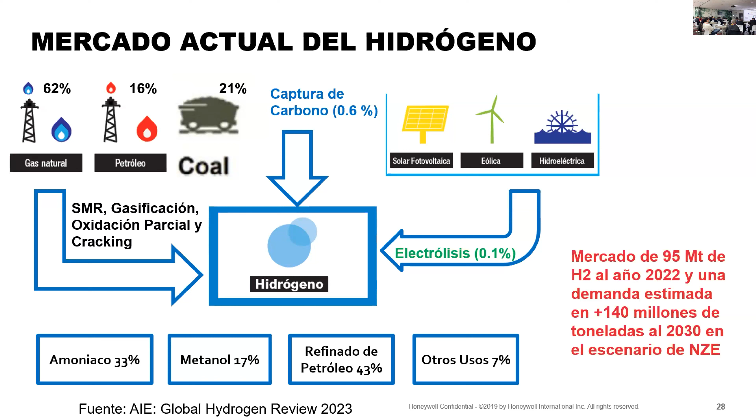No deseo decir nada más. A partir de ahora quisiera dejarlos con Jeff. Jeff, please go ahead.

Okay, can everyone hear me okay? Yes. Just sharing my screen.

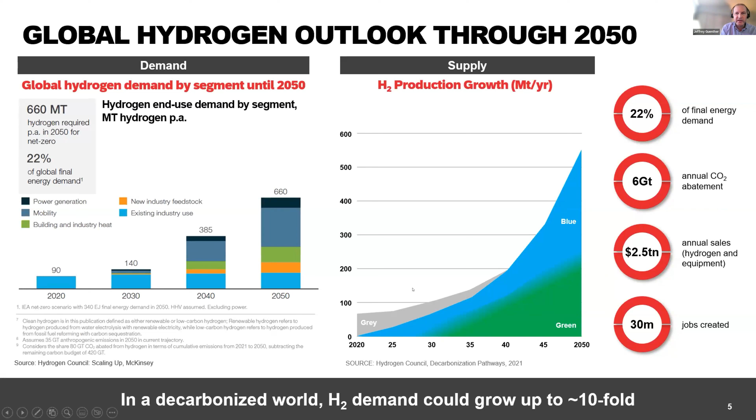Our view has been that that's a little bit secondary to the blue hydrogen market, with really a lot of traction happening post 2030, but certainly a lot of interest in that space right now and a lot of projects going through development phases. So that's really the story of hydrogen. And what I'm going to focus on is blue hydrogen, and what we have to enable blue hydrogen production today.

These are the two technologies that I'll be talking about. On the left is steam methane reforming, and on the right, autothermal reforming. The majority of hydrogen that's being produced today is through the steam methane reforming process. That's taking natural gas or methane, adding steam, operating over a catalyst to produce carbon monoxide and hydrogen, and then using a water gas shift reaction to further shift that CO with additional steam to produce additional CO2 and hydrogen.

This process is endothermic, meaning it requires heat to work. So that's why you'll see there's an additional fuel source that's needed to provide the heat for this technology. The key thing to notice here is that out of the SMR unit is a syngas that's rich in hydrogen. That's what's being produced.

But there's also a flue gas that's being produced in this process unit because of the need to provide an external fuel source and burn it. So you have carbon dioxide that's in this synthetic gas as well as in the flue gas.

The autothermal reforming technology is different. You can see it's methane reacting with oxygen to produce the CO and the hydrogen, which again will go through a water gas shift. This technology produces heat within the reaction, so it's not as dependent on any type of external fuel gas. There is still a small amount, but most of the heat needed to facilitate the process is automatically generated within the process.

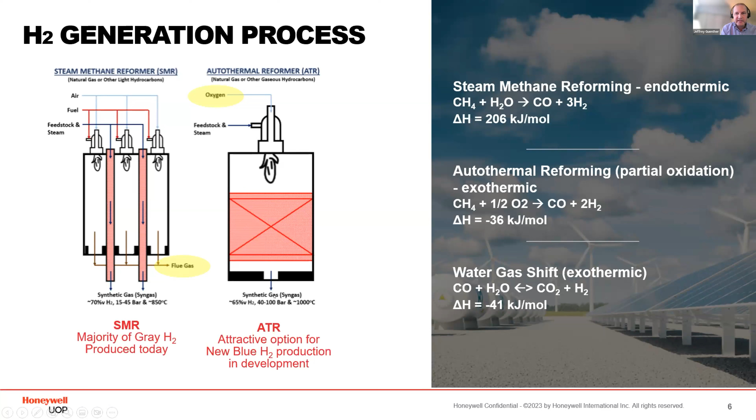What's key about that then is that all of the carbon from that feedstock is in this synthesis gas. Because there's not a large amount of external fuel gas, you're basically segregating all of the carbon in this syngas at a much higher concentration, meaning it's a really good opportunity to capture that carbon from that stream. So ATR is really being viewed as an attractive option for new blue hydrogen production because of its ability to really concentrate the carbon dioxide in that synthetic gas stream at a higher concentration.

So let's talk a little bit about what we have in the space of autothermal reforming solutions. As I mentioned before, the flow scheme is quite simple. You have natural gas going to your ATR unit with a water gas shift that's producing a hydrogen-rich syngas. Typical in the industry for any type of hydrogen production, it needs to go to a pressure swing adsorption unit that will convert that syngas, which could be in the 60 to 70% hydrogen range, into high purity hydrogen. So 99.9% or higher, which is typically what's required in refining and fertilizer applications and what's expected to really enable the hydrogen economy.

The tail gas or the rejection gas from this pressure swing adsorption unit is rich in carbon dioxide, so it could be between, again, 60 to 70% CO2 after it goes through the system, meaning it's a really good opportunity to capture that CO2. And when we think about capturing CO2, the higher concentration of the CO2, the more economical it is to capture. So what we're seeing in the marketplace is that these autothermal reforming units are really being looked at for large world scale hydrogen production, largely because of the benefits that you get from scale and due to some of the high cost to enable this process, for example, through this air separation unit.

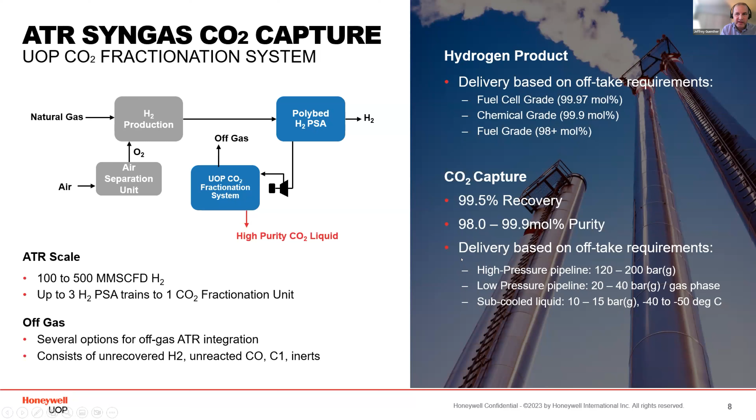So if we look a little bit more closely at the flow scheme for this technology, we have our shifted syngas coming out of the autothermal reforming unit, goes through a cooler and a knockout drum to remove any entrained liquids, and then into our hydrogen PSA unit. As I mentioned, this stream is typically in the 60 to 70% hydrogen range, with the balance being carbon dioxide, unconverted methane, and some inerts like nitrogen and argon.

The PSA unit is going to produce a high purity hydrogen product at high pressure, so in the range of 99.9% plus hydrogen purity. And it's going to reject the remaining components at low pressure. What we use in our system is a compressor to recompress it, a dryer to remove any liquids, and then send it to our CO2 fractionation system.

This is a fractionation technology, low temperature refrigeration technology, to fractionate and separate out CO2 as a liquid product with high purity. Coming off of the overhead of our CO2 fractionation system, we again have a hydrogen-rich gas, which can go to a PSA unit, which will reject any remaining CO2, which we can recycle to improve the overall CO2 recovery, and then further separate the hydrogen-rich gas for different uses. They could be used as a low carbon fuel within the process unit, or could be recycled back to the autothermal reforming unit to improve the overall hydrogen recovery of the system.

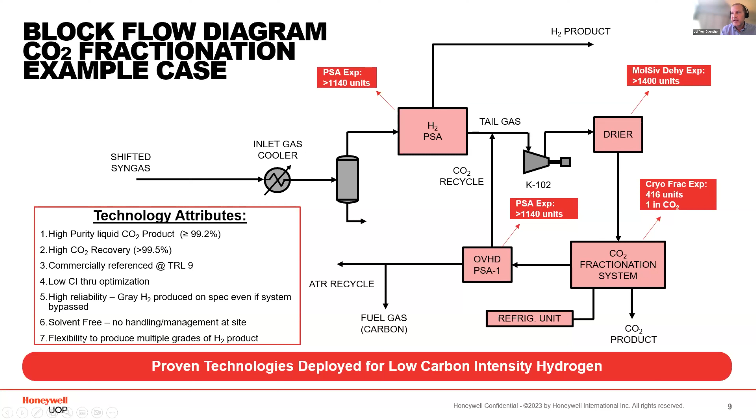Commercially referenced with a high technology readiness level, we can enable very low carbon intensities for hydrogen production, which is key for certain incentives in place today. There's also high reliability for the hydrogen production. Even if our cryogenic unit is down, this unit is still producing hydrogen, whereas other technology solutions deployed upstream of the hydrogen PSA would mean any interruption means the whole plant is no longer producing hydrogen. Finally, it's solvent-free, with no special chemicals needing to be handled, and with flexibility to produce multiple grades of hydrogen.

This is just a quick view of the building blocks of what this looks like. This is our polybed pressure swing adsorption unit. This is the molecular sieve dehydration unit, and this is a look at what the cryogenic system looks like. You can see the large tower associated with the fractionation and then the refrigeration section located nearby.

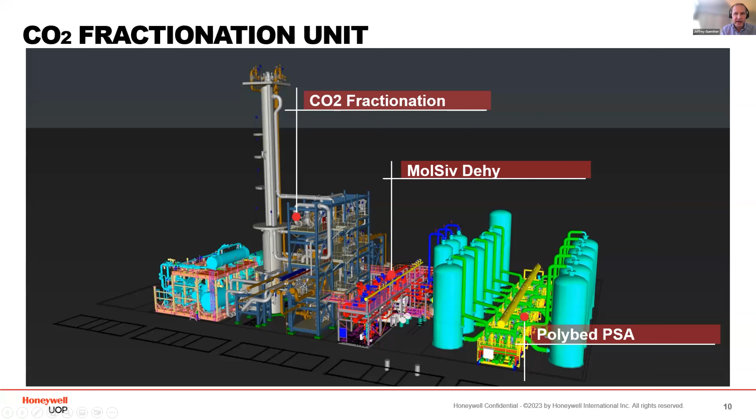All of this technology can be deployed in modular skids like this, which can really provide opportunity for reduced schedule at the site, because all of this would be prefabricated and shipped directly to the site. In very large scale units, it's likelier that there might be multiple hydrogen PSAs associated with the CO2 fractionation and MolSiv dehy unit.

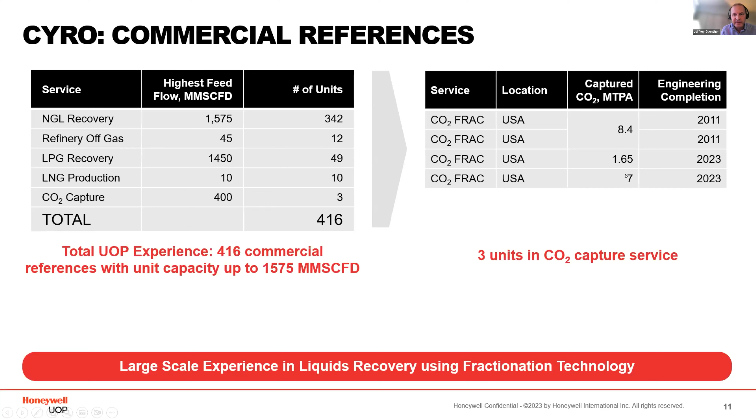I'd like to share a case study of what we really see as the trend in the industry. That's for a project where Honeywell UOP technology was selected by ExxonMobil, Baytown, for what to date is the largest announced blue hydrogen project in the world.

ExxonMobil is in FEED right now for this project. They've selected Honeywell UOP technology to become a world-scale blue hydrogen producer, both for their own internal use, to have hydrogen available to support the needs of their petrochemical plant, as well as to produce additional hydrogen that they can sell into the Houston market, both to existing users of hydrogen and to supply the hydrogen needed for the emerging hydrogen economy.

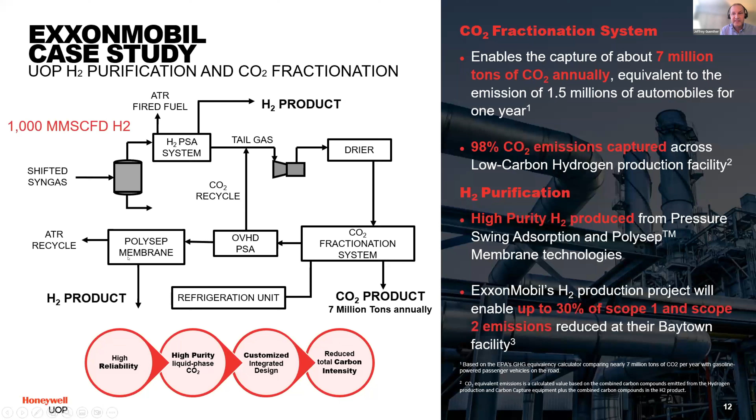Now I'll pivot to talking about steam methane reforming. The key with steam methane reforming is that there's a hydrogen-rich syngas, but there's also going to be a flue gas where carbon dioxide is being emitted. Typically about 60% of the CO2 can be captured in this pre-combustion loop, with the remaining 40% in the flue gas. So while pre-combustion refers to the higher concentration streams and a lower cost of capture, you're not addressing the full CO2 emission problem if you're not able to also treat this flue gas. That's the real key consideration with an SMR.

I'll cover this one rather quickly. We can employ the same scheme on an existing SMR where we take the tail gas from the PSA, run it through the CO2 fractionation system, produce an additional high purity hydrogen stream, and then recycle gas to the hydrogen burners after our CO2 fractionation system. Because of this additional high purity hydrogen we're recovering through our system, we can use that incremental hydrogen recovery to reduce the costs associated with the CO2 capture.

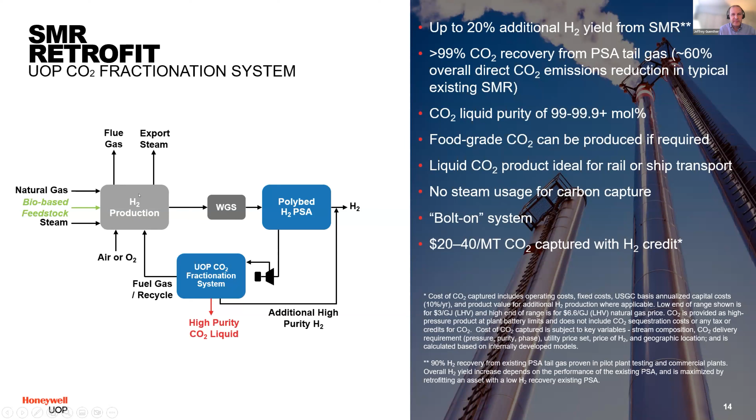You can see up to 20% additional hydrogen being recovered, with high recovery from the PSA tail gas, 99% from the stream, but again about 60% of the total CO2 emitted in the process. Multiple grades of CO2 can be produced, and it can be bolted onto an existing system at a low dollar per ton cost of capture when you consider the benefit of the hydrogen credit. It's important to note that since we're adding this within a process unit and changing the gas to the burners in the SMR, you likely need a burner retrofit.

Two other options. One would be a lower CapEx option where we use only CO2 PSA on the PSA tail gas. This will give slightly lower CO2 recovery and slightly lower CO2 purity, but does offer a lower CapEx and simpler installation if that would meet the needs of the CO2 product.

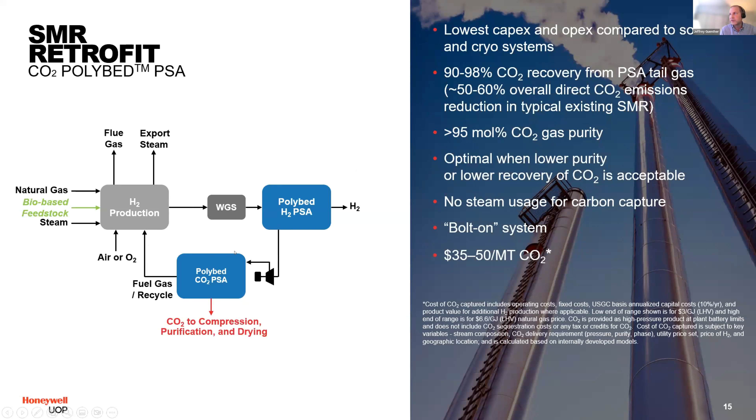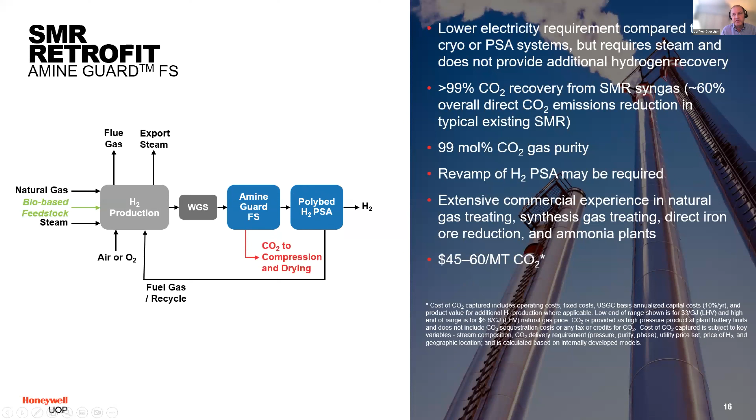Finally, we can also use a solvent system upstream of the PSA. This is well referenced in the industry, with high CO2 recovery from the syngas and high purity CO2 being produced. Now, though, because we're installing this solvent solution upstream of the hydrogen PSA, we're changing the gas composition, meaning you need to revamp this PSA as well as revamp the burners in the SMR. But this also offers a lot of references within the industry, with a number of customers very comfortable with this technology as a way to implement carbon capture.

The final option I'm going to talk about is using a post-combustion carbon capture system, but this time directly on the flue gas. Here we allow the process to run as it's operating right now, recover the hydrogen, have your CO2 rich stream go directly to the burners, and do all of your carbon capture here on the flue gas. This is a more complicated execution because now you have a low concentration and low pressure gas where you're doing the carbon capture. But we don't need to revamp any of the equipment currently in place, and this allows us to capture essentially all of the CO2. We're offering a total solution here because now we can capture about 95% of the total CO2 being emitted in the process.

But because it's a lower concentration stream, it's at a higher cost on a dollar per ton basis. We have a unique solvent with benefits related to its characteristics that reduce the capex and opex of the system, making it an attractive opportunity for people looking to maximize carbon capture on existing SMR production, as well as other hard to abate areas like steel, cement, and power production.

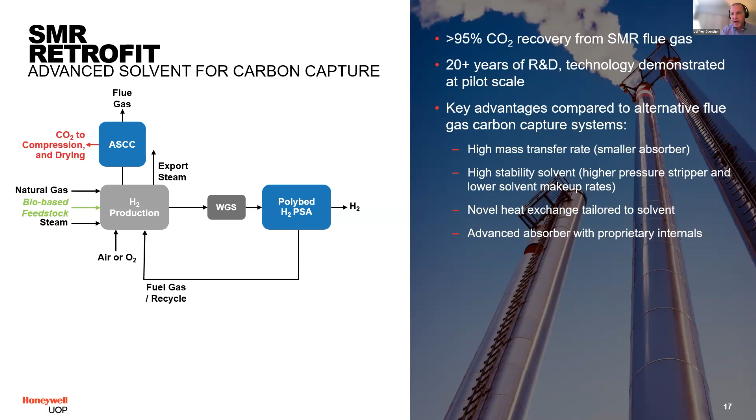This is an overall view of what these technologies look like. The key is really to see what the carbon capture is. As I mentioned, it's typically about 60% in the pre-combustion cases, but over 95% in the post-combustion case. But as you'd expect, the cost on a dollar per ton basis is lower in pre-combustion cases than in post-combustion cases. In all cases here, there are positive economics that would facilitate developing carbon capture projects on hydrogen production today.

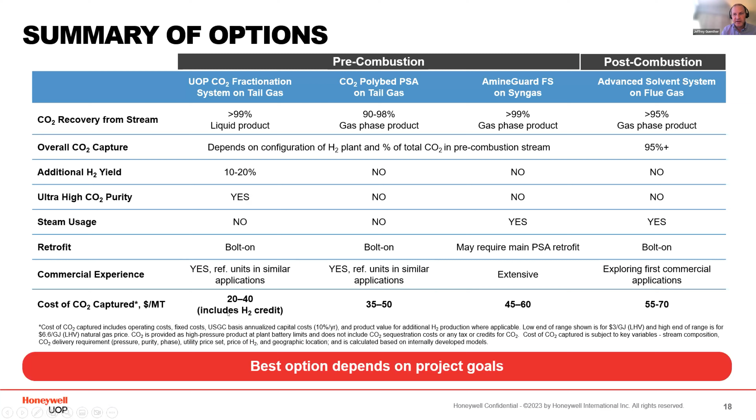So with that, hopefully on track with the timing, I'd like to wrap up. Decarbonized world shows a large growth in hydrogen demand with a pivot of blue to green hydrogen production over time. We have solutions for both ATR and SMR production, both in new units as well as existing units. And we've got the experience to deploy this technology to meet specific customer goals related to carbon intensity, capture cost, capture rate, etc.

So with that, I can wrap up, and Fernando, I can either take questions or hand it over to the next presenter.

Okay, thank you very much, Jeff. I think we are a little bit short of time, so I have one question for you that we would like to discuss. Regarding blue hydrogen, what do you see more interest in: retrofits in existing plants or new greenfields?

Yeah, so we're seeing a lot of interest. I would say right now the trend is really looking at new hydrogen production, specifically using the ATR process. Most customers looking to get into this are looking to expand their business opportunities as a world scale hydrogen producer, taking the CapEx benefits of producing at large scale, and making use of the latest improvements in technology to really drive down the carbon intensity. As we noted before, using existing production, you're a bit limited in what you can do from a carbon intensity perspective, and that's what we're seeing drive forward in the market. The ExxonMobil project is a perfect example of what we're seeing, and we've got a number of customers looking to produce similar projects and really target that low carbon intensity hydrogen production.

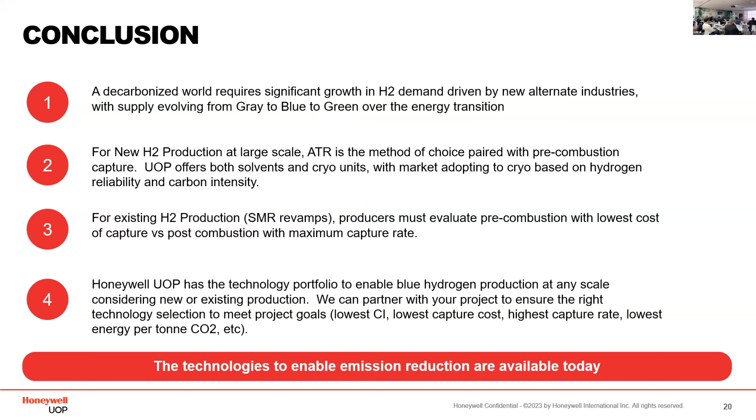Hi everyone, my name's Carol Zhang, and I work at Electric Hydrogen on the commercial team. I've been at the company 2 years or so, since the inception. I've worn a lot of hats in product marketing, but now I'm focused on customers and finding places to deploy our first projects. I'm going to lay out the roadmap of my presentation today.

We'll probably spend the first section talking a bit more about the hydrogen market, but with a green hydrogen lens, and then move into a deep dive of our product and what we offer. But before I jump into those two sections, it'll be helpful to do a grounding and introduce us more formally. We're a US-based company offering the next generation of ultra low cost electrolyzer systems to produce fossil-free electrolytic hydrogen at the industrial scale, but also, most importantly, at the industrial price point.

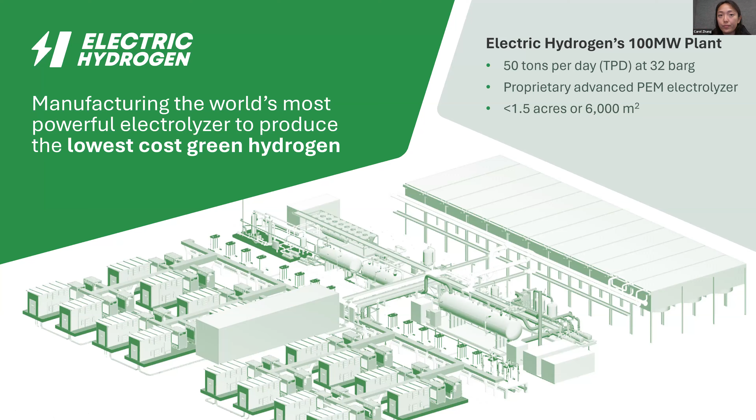But I want to take a step back and really talk about the mission. Why are we operating and commercializing this product? It's really because critical sectors need a lot of low-cost hydrogen to decarbonize, whether it's transportation, fertilizer, refining, steel, infrastructure, maritime—everything requires so much hydrogen to decarbonize, whether it's hydrogen, ammonia, methanol, etc. Today it contributes up to 25 to 30% of global emissions, and the opportunity to reduce further emissions as new use cases for hydrogen open up is enormous, as Jeff mentioned.

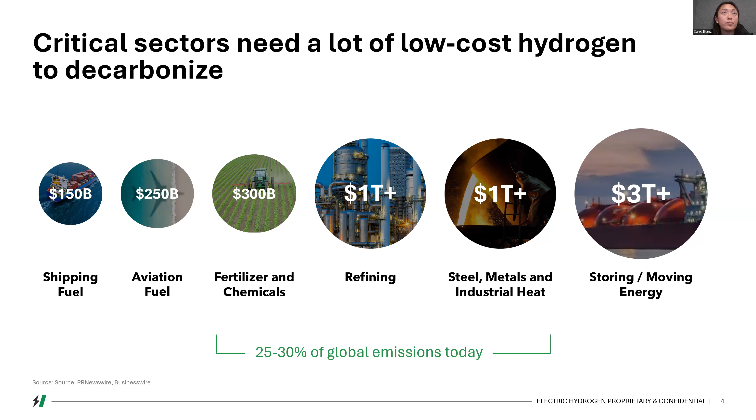When we think about the hurdles for green hydrogen adoption, it's really an economic issue. Green hydrogen today is far too expensive, and it's not competitive with gray hydrogen produced from SMRs today. So when we talk about cost competitiveness at our company, we don't talk about us against other green hydrogen OEMs and what their systems and machines can produce, but rather the price to beat for us is gray hydrogen.

To ground us in what that means, it's roughly $1.50 to $2.50 per kilogram that is the price to beat for green hydrogen. So it won't be until we're able to produce a levelized cost of hydrogen of about $1.50 to $2.50 that the economic argument for green hydrogen makes sense. And as we all know, the industrial sector doesn't make decisions based off of green premiums. It has to pan out economically.

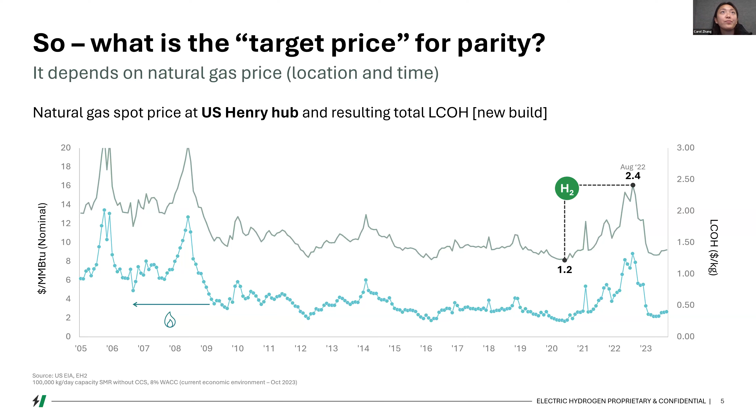If you look at where we're at today in terms of how much it costs to produce a kilogram of green hydrogen, it sits anywhere from $4 to $6 to $7, depending on where you are. Different areas in the world are kind of blessed with different resources that really drives that.

Something that we have published as a company is a public use calculator for customers, partners, and stakeholders in the industry to really understand what the drivers of green hydrogen production are. I'll quickly flip to what that looks like. So if you go to our website at eh2.com/toolkit, it has a suite of electrolysis modeling tools, essentially.

We call our model LCOH, quite simply, because that's what it models. It has a set of inputs that have key considerations that drive the dollar per kilogram number of green hydrogen. So you'll see CapEx here, cost of electricity, capacity factor, or how much you run it, and then it spits out a levelized cost of hydrogen. I'd encourage you, if you're curious, to play around with this tool after today's session. But that's essentially what's driving all the numbers to the right here.

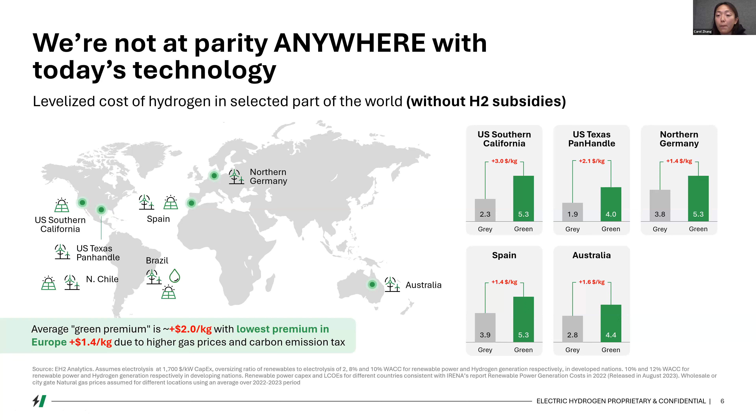So we see today gray, natural gas-based hydrogen stands at roughly $2 to $3 per kilogram. Green hydrogen, on the other hand, is nowhere near in the ballpark. And so that's where we are. We as a company were born to address this problem.

So the formula for fossil parity green hydrogen is really: to have cheap hydrogen, you need cheap power. It takes anywhere from 50 to 55 kilowatt hours per kilogram to produce a kilogram of hydrogen, so it's a huge cost driver. You need cheap power. And it turns out in most parts of the world that cheap green power is intermittent or has lower capacity factor. So the only lever you can pull in many geographies is necessitating really low cost electrolyzer systems.

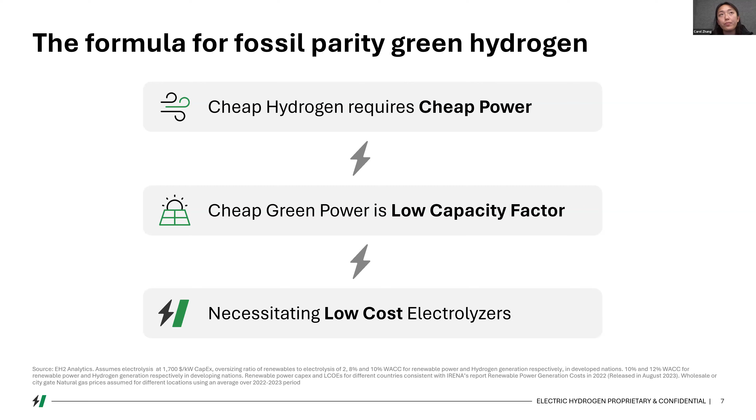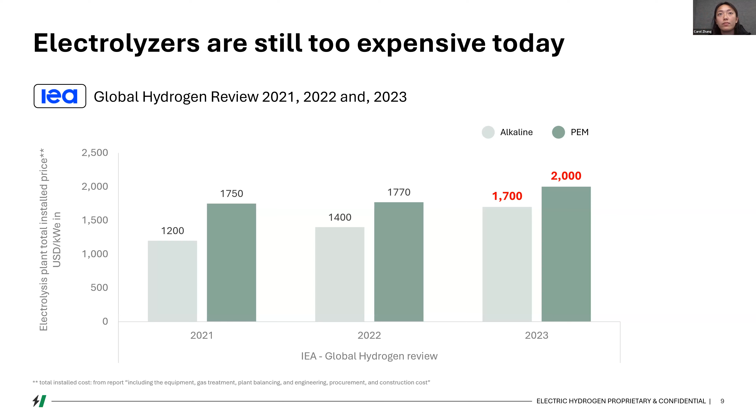So in order to solve the cost problem, as we discussed, we need to be able to offer a low cost solution for electrolysis. And that's when we come in. What we're offering to the market for the same scope of project deployment is a transformational product offering that slashes the cost of electrolyzer plants by nearly 30 or 40%.

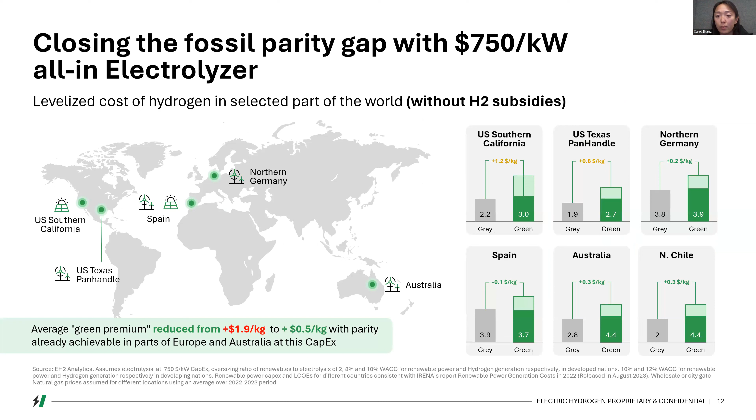Let's say this band at the very center sits roughly around $750 per kilowatt. And if we model that through, we see that we're not quite at parity, but we're a lot closer to what it would take to beat out grey hydrogen economically, at least.

And so how exactly are we able to do this? That's probably the big question. Everyone else has been building these plants at $2,000 per kilowatt. How are you able to do it at $750 to $800 per kilowatt? And the solution is this.

But another really big way that we're reducing costs of electrolyzer plants is through our product deployment model. So not only are we drawing our scope a lot bigger in that we're offering all of these equipment areas, our product is entirely prefabricated off-site on a set of skids.

And they arrive to the customer site on a set of 75 or so skids, and then are field assembled over the course of 2 or 3 months, and then commissioned over the next 2. So if you think about it, from first shipment to commissioned plant, it's 6 months.

So that's drastically reducing the in-field time of deployment and construction when most plants out there are kind of custom stick build.

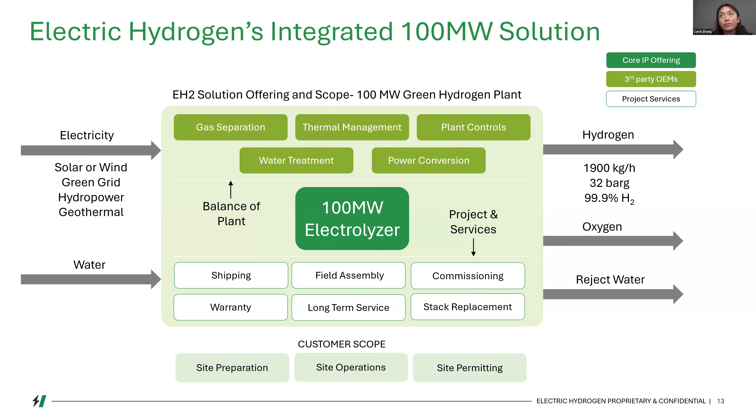So in terms of how this fits into the green hydrogen OEM market, the key differentiators for us are that we offer a complete solution. We are a turnkey solution in that we don't just give you the stacks or the rectifiers or the gas separation. We give you everything that you need to take electricity and water and turn it into high pressure and purity hydrogen.

Secondly, we offer really powerful stacks, and that's a key part of our cost reduction story. We've developed our own form of advanced PEM electrolysis that increases the capital efficiency of the electrolyzer stack, so that we get more hydrogen output for the same stack assembly. And we in turn pass those cost reductions onto the customer in terms of the price of the plant that we sell.

And lastly, we offer a very efficient plant. Our electrolyzer is co-optimized with our 100 megawatt plant design, but also, most importantly, our rectifier system.

So what you'll really see in deploying our plants is reduced project engineering costs, because the 100 megawatt plant unit is already pre-engineered and pre-designed; reduced construction costs, because the plant is pre-assembled; a lower CapEx because of our innovations at the electrolyzer stack level, but also in our innovations in procurement and managing our supply chain. You'll also see lower OpEx — we operate on dry cooling and have a lower electrical intensity.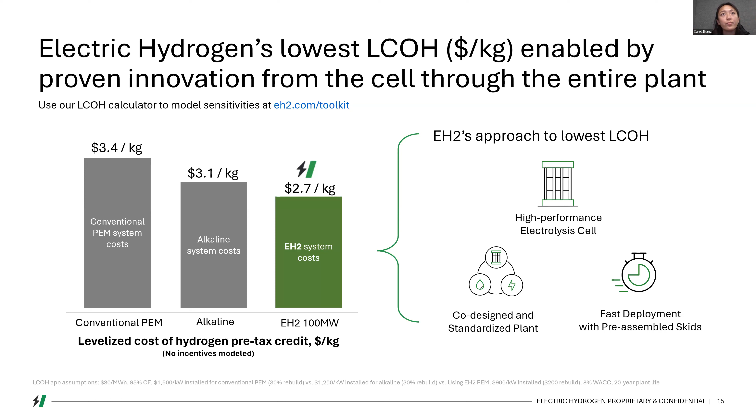And so in terms of our company and our journey, we are roughly 250 people today. We have a prototype plant sitting not too far away from me in San Carlos, California. We are commissioning our first pilot plant, roughly 10 megawatts, later this year. And then we are shipping our first 100 megawatt product next summer to a customer in Texas. We're based out of the US, bi-coastal. A lot of our plant engineering and power systems engineering sits on the West Coast, and on the East Coast we have a lot of our electrochemistry and manufacturing for our electrolyzer stacks.

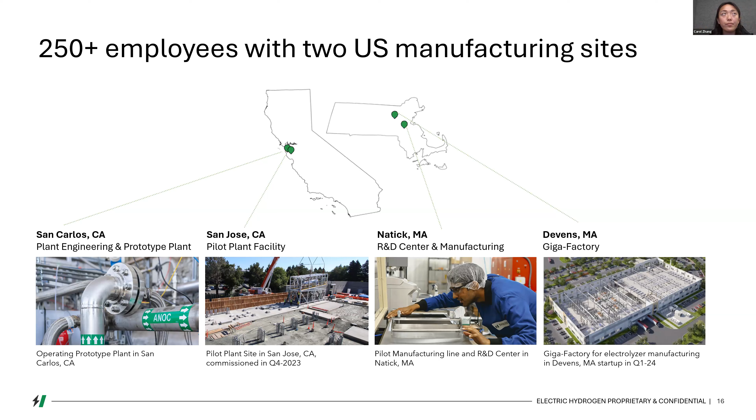This is some recent traction that we've had that we've announced. Our first 100 megawatt plant is going to a customer called New Fortress Energy, going to Beaumont, Texas. It's right next to an OCI plant and will supply the green hydrogen for them to produce green ammonia. We also announced a nearly $400 million Series C round a few months ago, so we're well capitalized all the way through scale up and deployment. And that's it. I'm happy to take any questions or wait until the end.

Thank you, Carol. A very interesting approach of a modular system, right? I think we have at least one question. What about the growing demand? Looks like green hydrogen is taking momentum. So how are you getting prepared for that demand?

Yeah, so right now our focus is on serving demand in the US. We are commercializing our first product, certified and operating in the US, and we announced our first gigafactory to be based out of Devens, Massachusetts, which will have a nameplate production of 1.2 gigawatts, which is not nearly enough to serve even a percentage of the global demand of hydrogen that we're talking about. We are probably going to site a second factory in the US in the near term, but are now actively investigating the next geography, whether it's Latin America, the EU, or Australia, and we're talking to customers like those in the room to understand the opportunity in each.

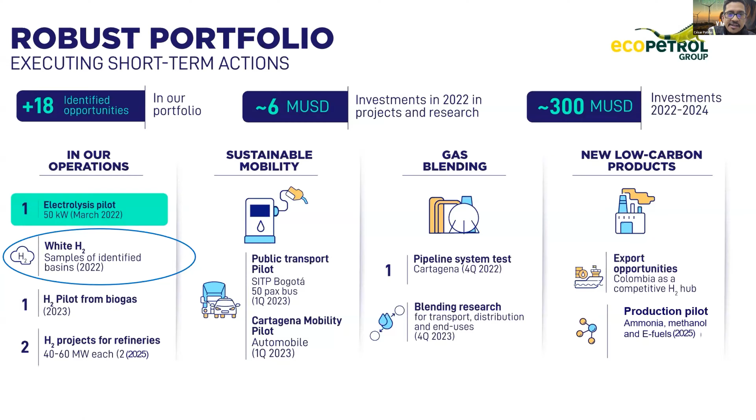You can see the strategy and how the portfolio has been taking these considerations into account. This is something we have already discussed and talked about previously; you have been following Ecopetrol's strategy information. But this year as well, we have been doing analysis and continuing to understand and include new technology options related to white hydrogen. In that sense, what we are doing in this natural hydrogen scenario is putting low emissions hydrogen into the understanding of the subsurface.

And that is the way that today, in a vertical way, we are putting together the information, the technology, and the acquisition that we have been getting from the mature field assets, from the geological understanding we have from the oil and gas industry. Because we have the reservoir information, we have deep information data acquisition, and we have processes underground and processes on surface that we should connect.

Understanding the different natural resources is something we are putting in place now, from a geoscience perspective. In the reservoir we have temperature, aquifers, and CO2 storage, which is used for CCS or blue hydrogen, related to our understanding. We have aquifers downhole, and this knowledge should be applied to create synergy with the information we already have.

So the subsurface resources overlap with different alternatives in the basins we have already studied to explore and bring energy from hydrocarbons. Now we are bringing new low-emissions energies into the hydrogen ecosystem, including natural hydrogen, from the geological understanding we have. This is why scientists today, through new exploration frontiers, technology and innovation, are bringing geological hydrogen storage, capture, and other hydrogen options into the system.

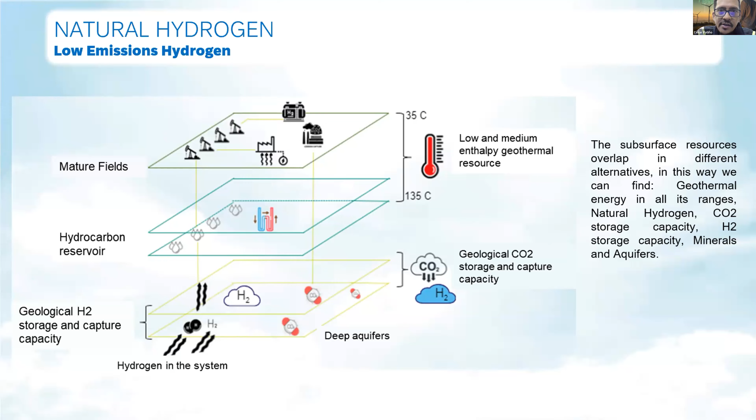So we have started working on a special estimate of natural hydrogen in the basins, looking at the assets we have in the Ecopetrol business group. Across our different assets we are looking at these alternatives and the feasibility of natural hydrogen in basins that can correlate with the resources we have underground.

This comes with probabilistic scenarios as resources, special leads and prospects, and what is happening today in geoscience with geological hydrogen coming from natural or gold hydrogen—in some cases not named as such, but all related to low emissions hydrogen.

Hidrógeno blanco, as we say in Spanish, is now emerging as a low emissions hydrogen. In 2011 there was a natural hydrogen discovery in Mali, Africa, with some challenges but also opportunity to increase energy supply and provide ammonia resources for special products in Mali.

This comes as well with the opportunity we have in Colombia with Colombia's hydrogen roadmap. The government and industry have a special roadmap that includes lines and items for working on natural hydrogen, like line 17 and line 18.

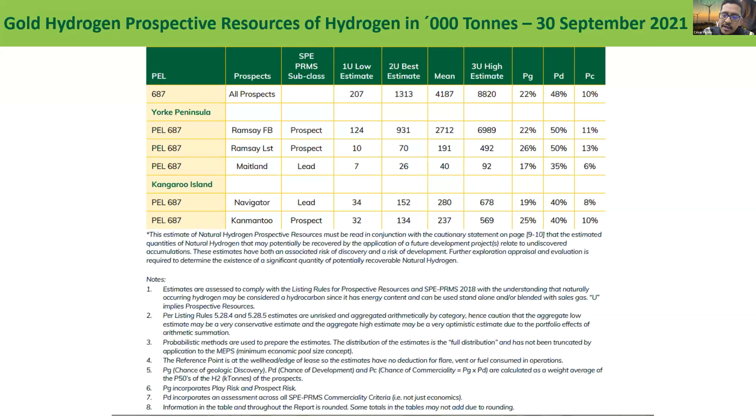So the invitation now is for all these hydrogen ecosystem players to put value not only on the green and the blue hydrogen, but as well the white one, or natural hydrogen, in their perspective. The market is giving value now on that, and the resource evaluation, the companies with exploration and production in this area will be having some value as well.

And this recognition is happening not only in Colombia, we are doing studies around the world to understand where these natural hydrogen resources can come from. The United States is starting an aggressive campaign to acquire information, to start workflows related to the natural hydrogen perspective, even from Nebraska, from Kansas, and some areas in North America. But as well we have in Europe, Spain, France, and other areas, Russia, that have come with some understanding.

China is working on these natural geological options, and as well the discovery in Mali, and perspectives in Namibia and other countries around South Africa can come as well in Africa. But Australia is today the primary area, and in two weeks there's going to be a natural hydrogen world technical conference where all the evaluations and results taken on these considerations and explorations are coming with more value related to this type of hydrogen.

This type of hydrogen is provided by nature, and will be found at different depths. It can be surface, medium depth, or deepest depth. But as well, this type of hydrogen can be found as free gas, as gas in inclusion, or dissolved gas.

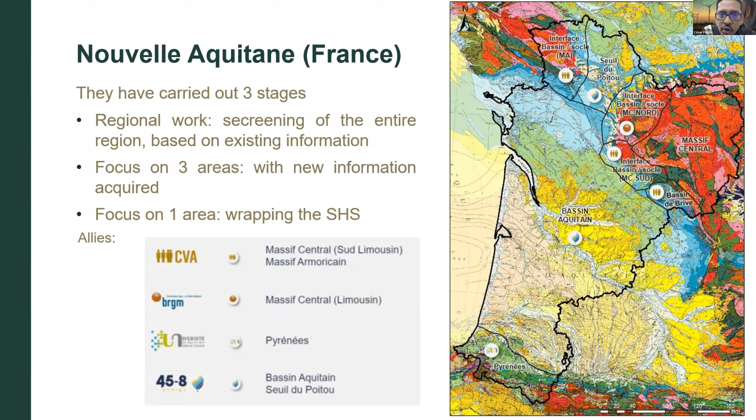We've already been working here in Colombia with companies providing service for the value chain to understand the underground, as well as providing special technologies to make this happen and provide options on the surface. Colombia, but also France, is doing this type of analysis, trying to recreate and put into scenarios different areas of information, data, and technology that can provide these options for the geological constraints.

That's also happening in France and Spain, where hydrogen has been identified at the Pyrenees, as you may have seen in the news.

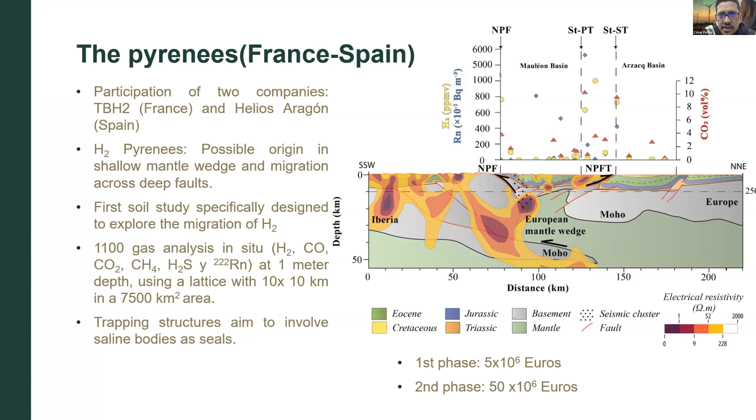Hydrogen is not coming alone. It's coming with CO2, methane, H2S, helium, and other types of gases. So looking into what's producing and how we're going to provide it to the industry is part of what we're doing on the surface in some of these processes. How we're going to put the different elements together on surface, but also underground, is a challenge we have.

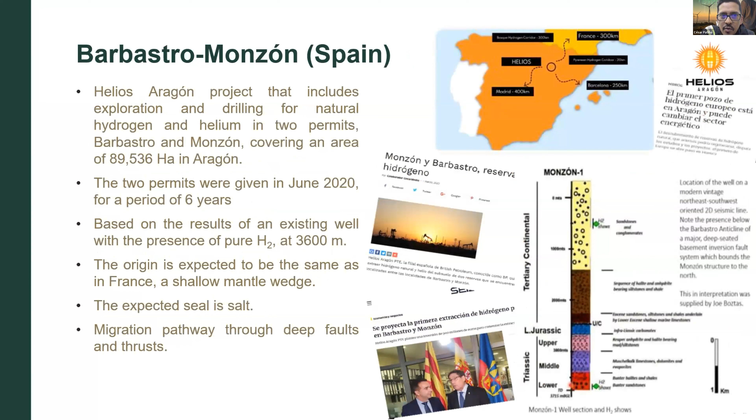The same is happening in Spain, where now hydrogen and helium have become significant in special areas in Aragon, where they have a special geological discovery with this option, as well as in some areas near France.

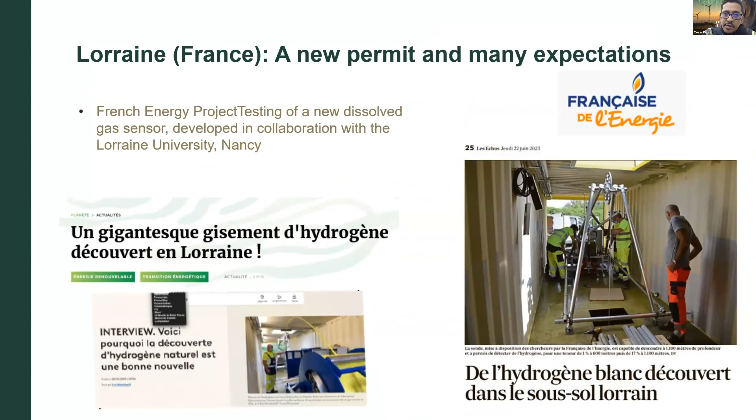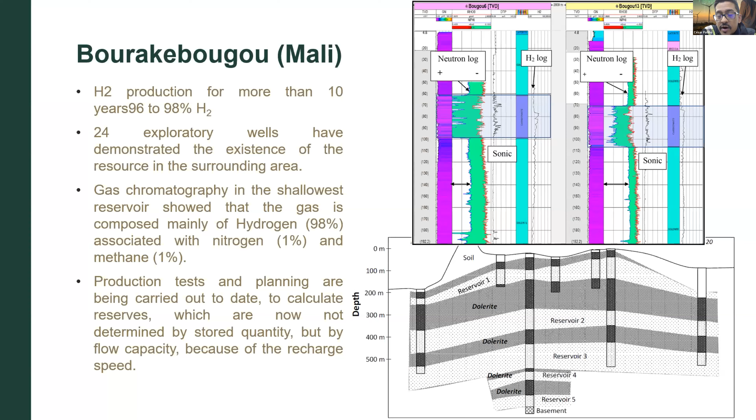The move on hydrogen started in Mali in 2011, where some wells, today around 24, are producing around 98% pure hydrogen from underground. We are understanding the technology, the behavior of the different data and information we've acquired on the ground, to understand this 98% hydrogen on surface, which can also come with nitrogen, methane, or other gases, in order to identify how we can produce it.

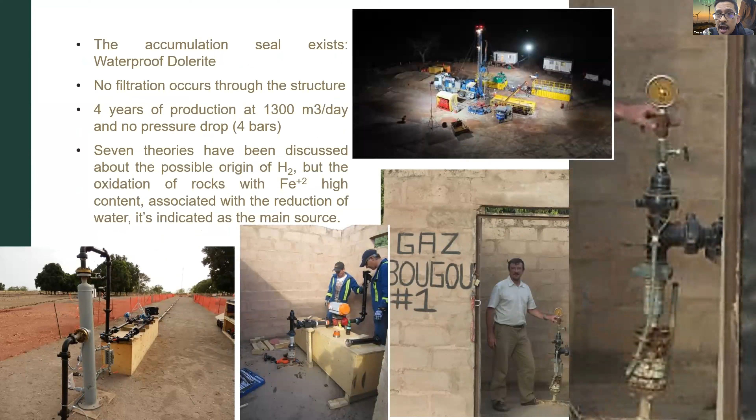These are pictures of the first well that delivered this type of white hydrogen gas, under the different geological conditions we're trying to understand around the world, around the geological constraints, to find these main sources and open the valve to low emissions hydrogen.

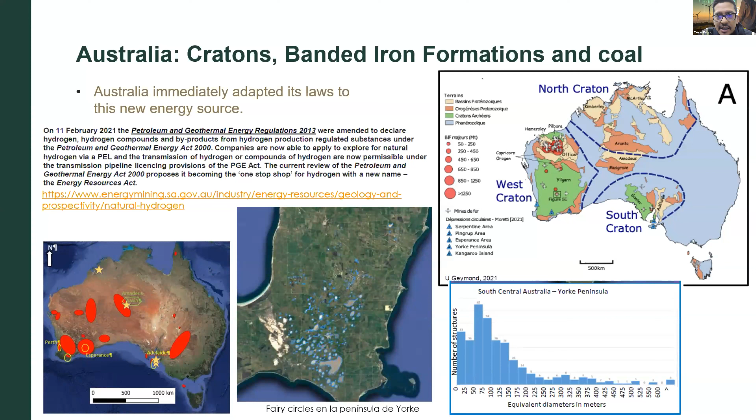That comes as well with economic opportunities, as we see in Australia. Australia continues doing an aggressive campaign to put this exploration of natural hydrogen in different areas, doing the blocks as mentioned before, as well as synergy of the technology and knowledge we have underground. So there are different perspectives, but also options that include natural hydrogen.

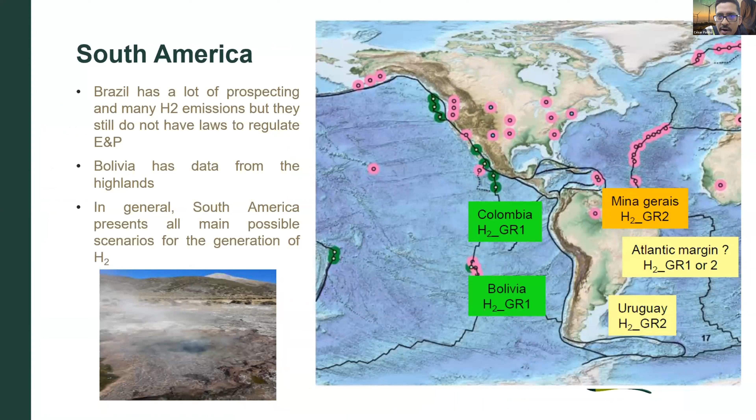In the perspective we have for our renewable portfolio, this is something that will become important. We've found some expressions of these options in Brazil, in Colombia, and also in the United States, where you can see hydrogen coming out from the ground. It's coming out based on measurements we're taking on the surface with a special camera, a special measurement.

So it's not something that isn't happening. It's happening, produced by the natural occurrence of natural hydrogen, which is also coming with different explorations in other areas in the United States that have taken opportunity of well sites and exploration conditions, finding it along with other types of gases as well.

There's some exploration and investment happening around this type of natural hydrogen, and you've probably seen this type of news on social media and social networks. But it's not only these types of investors—today governments, institutions, and companies like ours are working on this.

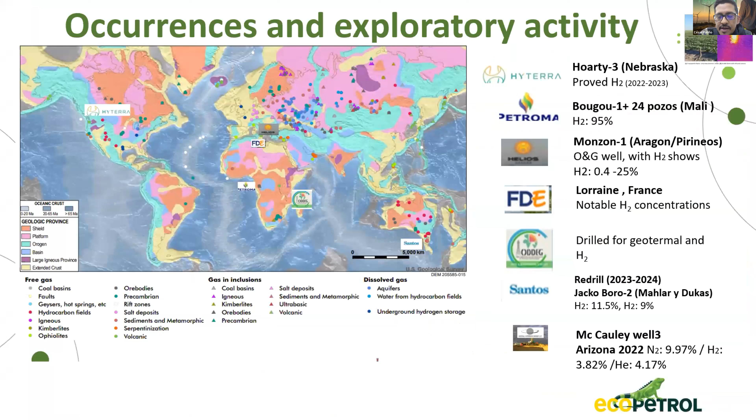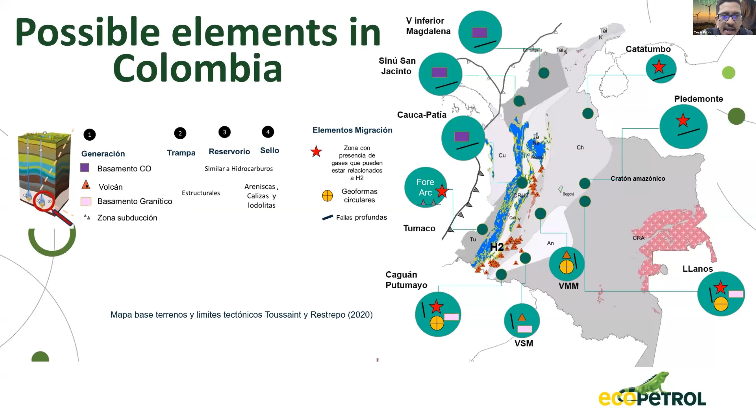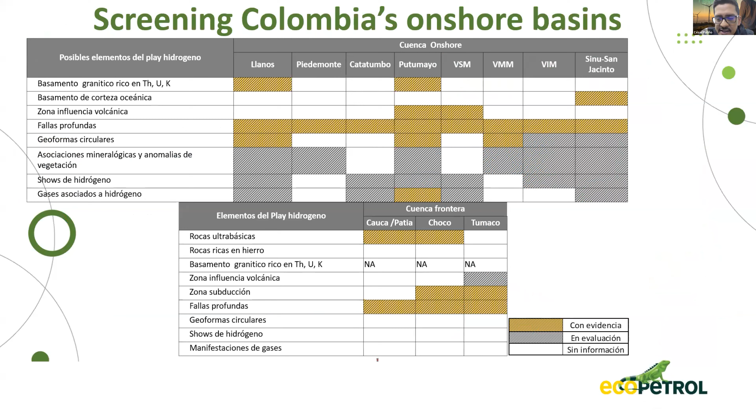This comes with the ecosystem scenario we mentioned before, and it's what we're doing in Colombia. We've identified special areas and basins where we can find this type of scenario that's happening around the world, providing the special geological scenarios and options that can be put into different basins. What do we have? How can we bring value to these options? It's something from the Llanos Basin to the Pacific system that we're working on.

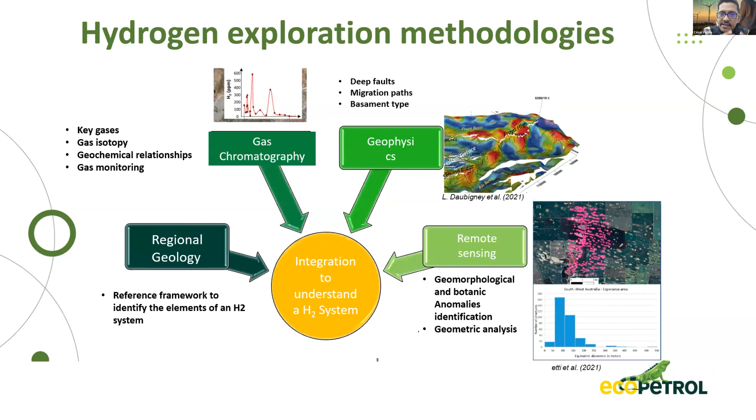We already have been recreating workflows. We are working on identifying special elements on the knowledge we already have, where we have applied technology from the understanding of the underground, from the processes, from the accumulation, and as well for the production. So in this sense, we are doing integration from different previous methods of technology, from regional geology, special gas chromatography—as the gas chromatography used in surface, but we use it in underground—geophysical knowledge, and remote sensing with satellite information, to integrate all this into the hydrogen system that is not only at a special base, but at a big scale that can come with the production we have.

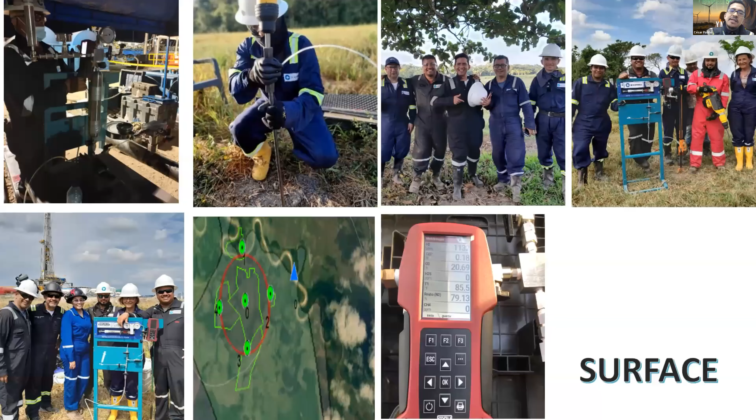Coming from underground is something that we put in technology, understanding from the geophysics, from technology that goes from different scales, from mega scale to nano scale, is something that we are working on as well to do this type of integration. But the good news is we already identified it.

We have already found flows of hydrogen at the surface. We can see on the meter about 1,000 ppm coming out in some of the areas we have identified underground, in-house. So that is something coming from underground and surface, and nature is producing this type of hydrogen resource. Another study done by the academia, by the university, identified hydrogen, methane, CO2, oxygen, and H2S related to some of these basins. So we are working in that sense.

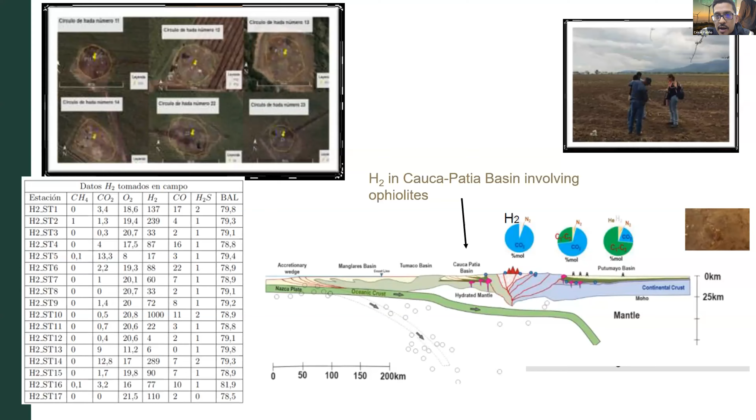We are publishing more and more about natural hydrogen, and we hope this gives you value on the hydrogen route that we are working on together with the different international community. We will see how we can put together these volumes of hydrogen at different geological environments and options that can be replicated in Latin America scenarios, to find a natural source and resource of the environment to put together this industrial application.

One important thing is industrial health. It's very important to put technology on this, to co-create, to bring the alternatives of this geoscientific knowledge together with the technology already in surface, and we can create scenarios for the carriers, or how we handle, or how we are going to produce, or how we are taking opportunities from the natural opportunities of this hydrogen ecosystem, in the coexistence of the energy transition alternatives.

With that, I would like to say thank you to the different institutions that have been helping us work on natural hydrogen: the Low Emission Vice Presidency, Upstream, Technology and Innovation, Research Institute, HOCOL and Ecopetrol, and different service provider companies that have been working with us. I will be open for questions. Thank you.

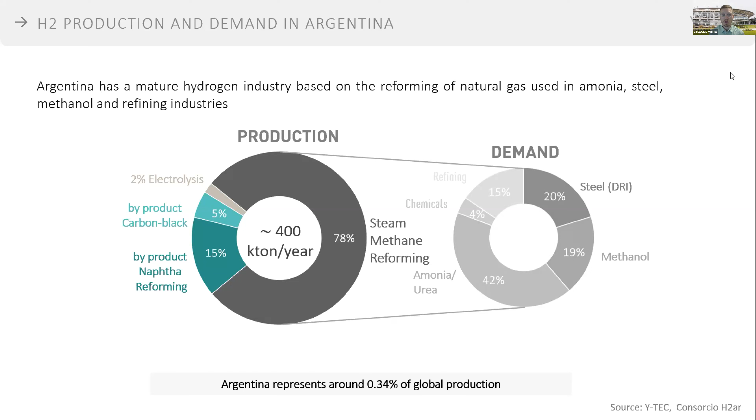Otra cosa que quisiera destacar: pueden ver en la línea de producción un porcentaje bajo de lo que es electrólisis. Tenemos el caso a nivel país de una compañía que ya desde el año 2008, bastante pioneros a nivel mundial, ha instalado un sistema de electrólisis con el cual, desde esa fecha hasta hoy, ha realizado diferentes pruebas, y hoy en día es una empresa bastante pionera en términos de producción de hidrógeno por medio de electrólisis.

Esto también es un panorama extraído de la estrategia que acaba de publicar Argentina. Más allá del número en específico, lo que plantea es que a nivel regional, las diferentes hojas de ruta que están planteando los diferentes países a diferentes momentos, 2025, 2030, 2050, no importa, muestran un gran crecimiento en la demanda de electrólisis que se va a requerir.

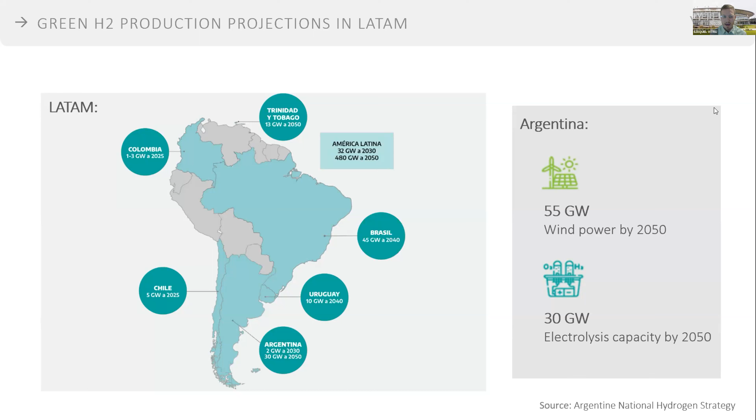Particularmente en Argentina, lo que se plantea es un gran crecimiento en la producción de hidrógeno, tanto para consumo interno como, sobre todo, para exportación, lo que va a requerir un incremento de la potencia de electrólisis a instalar y, en consecuencia, un incremento de la energía renovable asociada a esa electrólisis.

A lo largo de las diferentes presentaciones que vieron hoy, y por lo que vi de la agenda lo seguirán viendo: en términos generales, el mundo, si seguimos los escenarios de transición energética y descarbonización, vamos a requerir una cierta cantidad de hidrógeno. Pero tenemos que entender si vamos a poder abastecer de esa cantidad de hidrógeno al mundo.

Ya se ha encontrado que va a ser muy difícil cumplir con esa expectativa, y uno de los cuellos de botella con los que nos estamos topando es la disponibilidad, la accesibilidad a electrolizadores que permitan la producción de este hidrógeno. Podemos sumar una capa más al análisis: ¿dónde se encuentran los principales fabricantes de equipos que pueden producir hidrógeno? Se encuentran en el hemisferio norte.

Esto, más allá de pensarlo en términos de localización de las factorías y demás, genera un plus a la disponibilidad del equipamiento. Genera un escalón más que tenemos que llevar a cabo para poder conseguir la tecnología puesta en el lugar donde nosotros la necesitamos.

Hay dos comentarios que quisiera hacer al respecto, dos noticias que se pueden recabar de la información. Por un lado, en Brasil hay una compañía llamada Hytron, que es un spin-off de una universidad, fue adquirida por el grupo NEA. Y en Chile, la empresa Corfo hizo un request for information, teniendo en cuenta compañías que tengan capacidad o interés en fabricar electrolizadores.

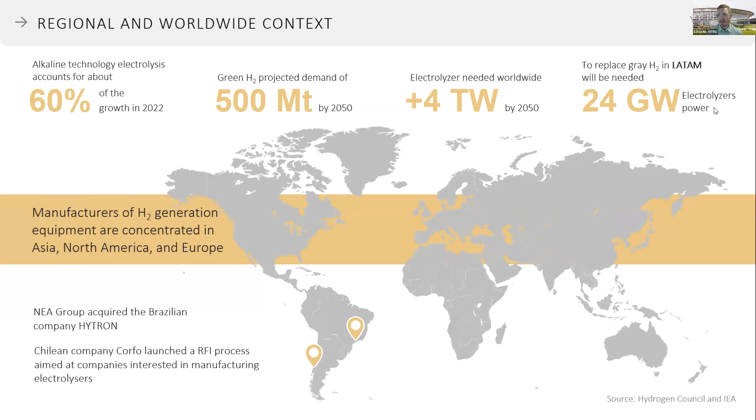Por todo este contexto, desde Y-TEC, YPF Tecnología, se ha tomado como proyecto estratégico el desarrollo, la construcción y optimización de un electrolizador alcalino de alta potencia, superando el megavatio, para la producción de hidrógeno verde. Este primer prototipo se está pensando para ser empleado en una industria vinculada al acero, para el reemplazo prácticamente del gas natural.

Antes de avanzar en el proyecto, quiero detenerme en dos términos que he empleado. Primero, estamos hablando de un electrolizador alcalino. ¿Por qué? Básicamente, los motivos que nos llevan a iniciar este proyecto, que ya lleva más o menos un año de vida, es que la tecnología alcalina hoy en día es la que tiene mayor porción en el mercado, es la que ha recorrido más camino.

Eso genera que pueda obtenerse muchas veces costos más competitivos, y al mismo tiempo nos muestra que es la que tenemos más información, tanto en publicaciones científicas como en términos de los mismos tecnólogos. Por otro lado, teniendo en cuenta las diferentes tecnologías de electrólisis, es la que nos permitiría tener un desarrollo con mayor componente de industria local versus otras tecnologías. Por ese motivo se elige esta tecnología como primera para iniciar el proyecto.

En líneas generales, ¿cómo está ordenado el equipo de trabajo? Nosotros no estamos trabajando solo en Y-TEC, estamos asociados con diferentes institutos de investigación de Argentina. Y estos institutos se encuentran distribuidos en diferentes provincias de Argentina, lo cual le da también un carácter bastante federal al proyecto.

Tenemos reuniones virtuales bastante frecuentes y luego también reuniones presenciales con cierta periodicidad para tener una actualización total del proyecto. Desde YPF Tecnología somos la columna vertebral de este proyecto, no solamente porque estamos con el gerenciamiento del mismo, hacemos el relacionamiento con proveedores y con aliados estratégicos, sino que también intervenimos en las diferentes áreas de trabajo vinculadas para el desarrollo del proyecto.

Por un lado, tenemos una parte muy fuerte en lo que es modelado computacional, tanto del stack como del balance de planta. Por otro lado, estamos desarrollando los materiales que tenemos que incorporar en el electrodo. Luego tenemos que diseñar y desarrollar el stack en sí mismo con su balance de planta, construirlo, enviarlo a construir, ensamblarlo, testearlo. Y finalmente, también tenemos que orquestar todo esto con un sistema de control que permita una operación eficiente y, sobre todo, segura.

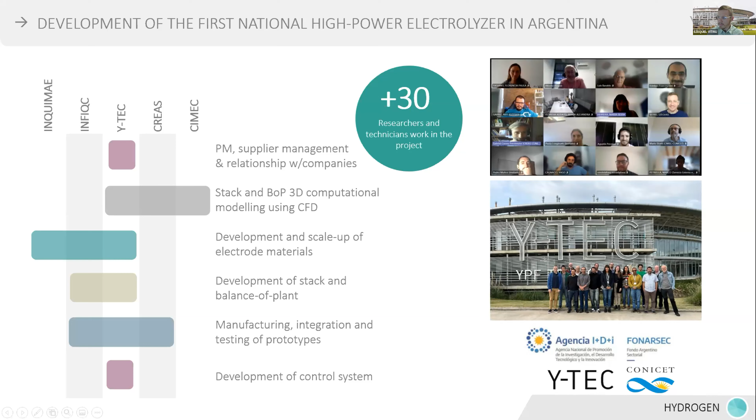Con respecto a la fase 1, en la que nos encontramos actualmente, ya tenemos un primer diseño de esta bicelda, ya estamos enviando a construir las piezas para hacer el ensamblado de la misma. La mayoría de los insumos se encuentran en la industria local, a excepción de la membrana de Zirfon, la cual debe ser importada.

Otra cosa que quisiera destacar, que no nos parece menor, es que en compañía junto con el desarrollo de esta bicelda electroquímica, estamos haciendo una estación de testeo. Hay una facilidad, una parte de una planta piloto de Y-TEC, a la que le estamos haciendo todas las adecuaciones para que se opere con hidrógeno. Hoy en día no existe una estación de testeo para estas potencias y dimensiones, y este proyecto va a permitir que salgan versiones B, versiones C, donde uno vaya mejorando, haciendo otro tipo de tecnologías de electrolizadores, y también futuros proyectos que surjan se van a poder testear y evaluar dentro de esta estación.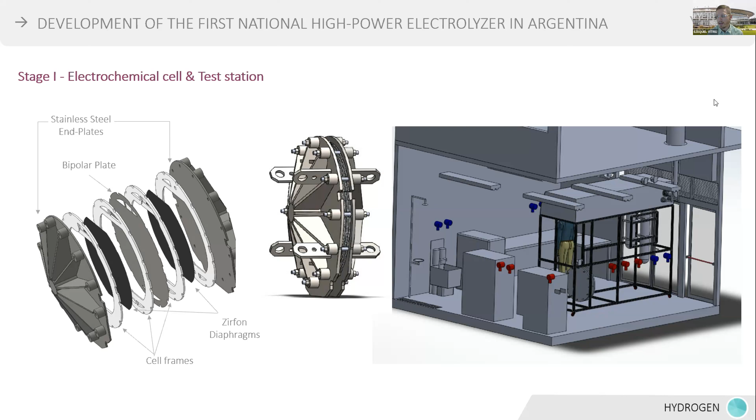También, dentro de esta primera fase del proyecto, se están haciendo diferentes simulaciones. Nosotros tenemos que validar que mecánicamente los materiales van a soportar las condiciones de presión y temperatura en las que estamos trabajando, y que vamos a poder garantizar una hermeticidad de nuestro prototipo. Y por supuesto, necesitamos tener una muy buena distribución en términos de cómo va el electrolito y cómo se generan estos gases dentro del electrolizador.

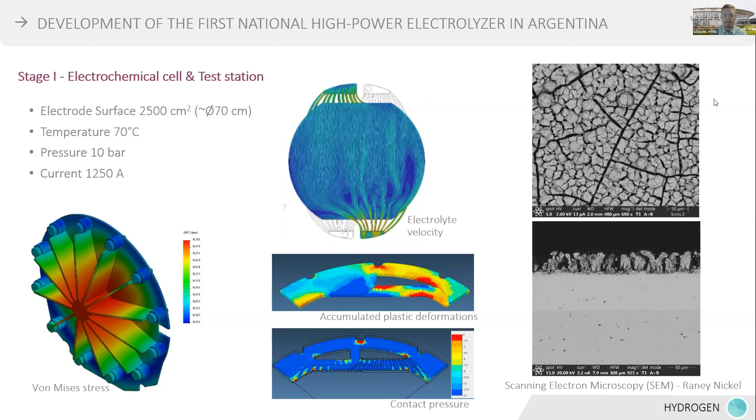Tenemos un desarrollo en términos de materiales. Hoy en día estamos trabajando en particular con materiales niquelados, con la idea de obtener electrodos que me generen un área activa para poder separar la molécula del agua en hidrógeno y oxígeno con la eficiencia que se requiere para este tipo de dispositivos.